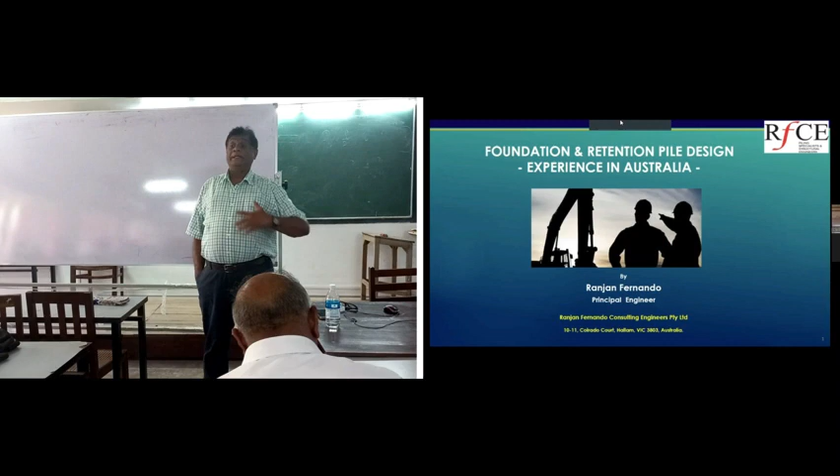That's been my job since 2010. Even now I'm doing the same thing, but with different companies, because my old company is no longer trading in Australia - I lost my professional indemnity insurance back in 2008. So let's get on to the presentation.

This is the presentation I'm going to do, but I won't spend too much time explaining it. There are 11 case studies, all projects already constructed, nothing went wrong - all my value engineering designs where Australian engineers designed one and I changed it and signed off. Except for one, I signed off on the rest of the designs. They were done before 2018.

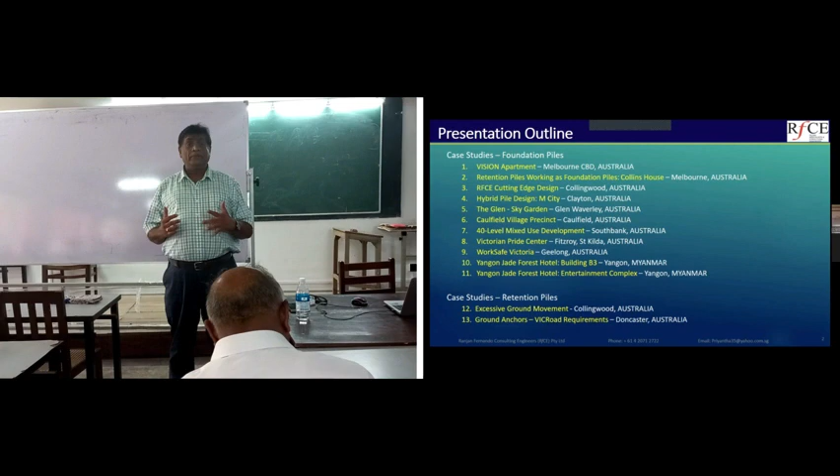Then there are two nice case studies you can learn many things from, but mainly my expertise is only piling. So even in geotechnical engineering, I do pile design, retention, ground anchors, foundation piles - anything related to load bearing or laterally loaded piles.

This is case study one. If you go to Melbourne or Google it, you can find this - I think it's number 72, a story called Vision Tower, where I completely optimized the foundation design. It's a huge loading, so I'll show you what I've done basically.

Not very sure whether you can read things, but later you'll have time. Can you see that there are very few piles, and one-third of the footprint is taken by the core area because of huge wind loads and earthquake loads? Those loads are provided by the structural engineer - I've got nothing to do with that. I take their loads.

My expertise is the geotechnical part, what we call value engineering with rock mechanics, using the parameters. When you do your geomechanics, you must know how to do the borehole and how to follow the soil report parameters. But in all my designs, I don't follow the geotechnical engineer's parameters.

That's my specialty. Even Golder Associates, Douglas Partners, Coffey - all three top-class engineering firms in Australia - they give parameters. But starting back in 2010, I did a bit of research, went to the job site, understood the quality of the rock, and started my own approach. Before I did that, there was no engineer capable or willing to take that risk to come up with this design.

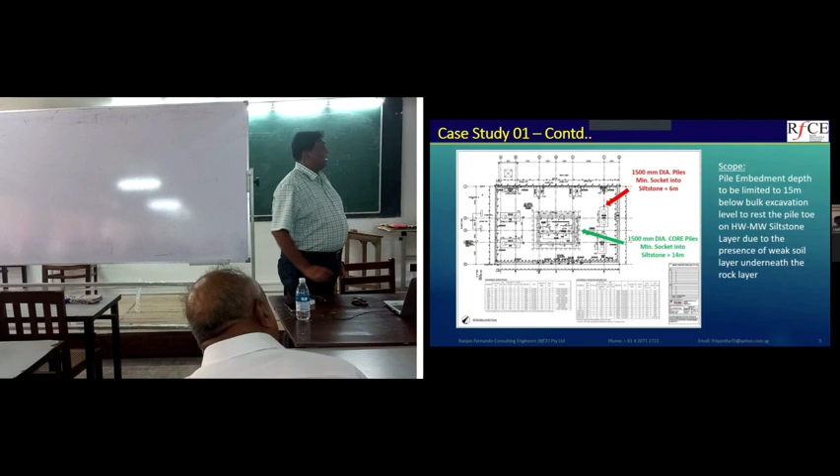Can you see the excavation? I designed a temporary retention system with ground anchors, and you can see the piles started about 6 meters below. That's the core area, and you can see the foundation piles. The ground is very good, can you see? No formwork - they cut it vertically because it's stiff clay.

This is something called PDA testing. I'm not very sure whether you are learning these things in final year, but when you go to practice, you will learn. It doesn't matter if you haven't learned PDA yet. It is pile driving analyzer - you design the pile, then test it to check whether it can carry the bearing capacity and the skin friction.

When engineers challenge my design and say I can't use this parameter, I say I will do PDA testing, and I will prove that the parameter provided in your soil report is not accurate. So we have to spend a bit of money.

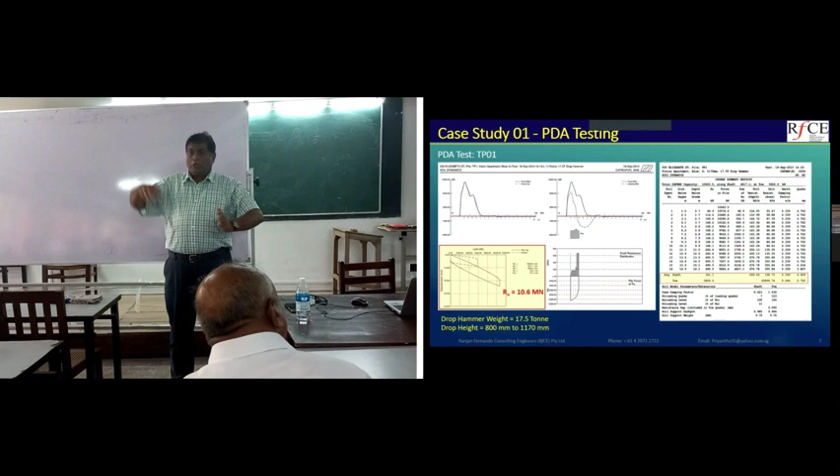What we normally do is build up the pile about 1 meter above the ground with good concrete, 65 MPa. You drop the hammer, put some energy, try to push the pile. Then you measure with strain gauges - I can talk about PDA one day, but briefly, you measure the settlements with the capacity.

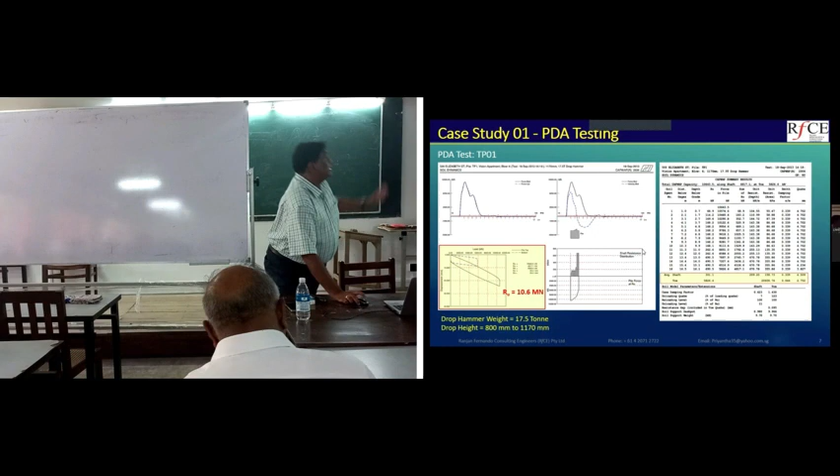The PDA analyzer will tell you what is the skin friction and what is the area for each layer. If you look at the right side - I'm not sure whether it's clear - you can see each layer, what is the KPA value for ultimate skin friction and ultimate end bearing. This is done by an independent engineer, not myself. He gives the report, then we submit it together to the checking engineer, and he has nothing to say. That's another test we have done, about 1 to 2 tests for each job.

If you look here, let me brief a little bit. There are certain indicators for how you interpret this - RMX capacity, all that you can go through later. This will tell you whether the pile is damaged.

When you get that BTA value, what's called the pile integrity factor, if it's 100%, your pile is perfect, you don't have any problem. Otherwise you might get necking, bulging, or vertical cracks. The other value will give you capacity - you can see in one corner they picked up a capacity of about 10 meganewtons. So then we compare with what we designed and show there is a safety margin.

This pile is 600 diameter. In Sri Lanka, I'm not sure any engineer would design 600 diameter for 10 meganewtons - am I right, Professor? They might go with 3 meganewtons. So that's the capacity I have proved on the rock.

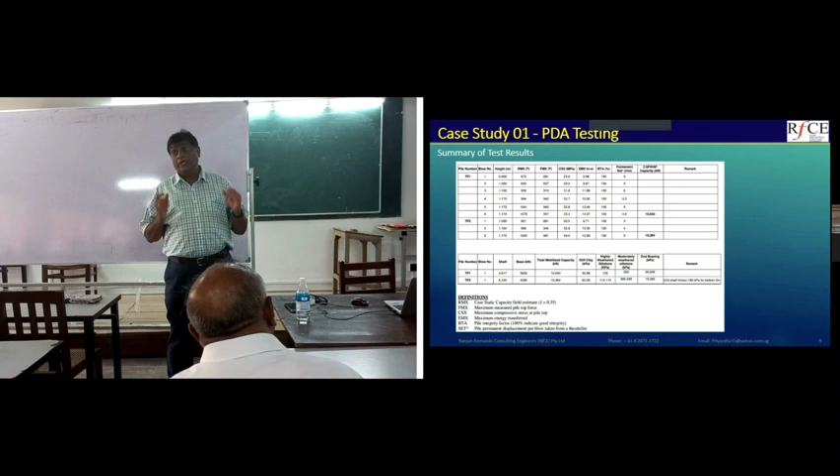You need to do this very carefully with the rock, then check it is within the right material, because when they challenge you and the pile fails, you have no face. Then the whole design gets rejected and you lose face with your client, because you have to add extra piles since your capacities are less. So we always make sure we do the right thing.

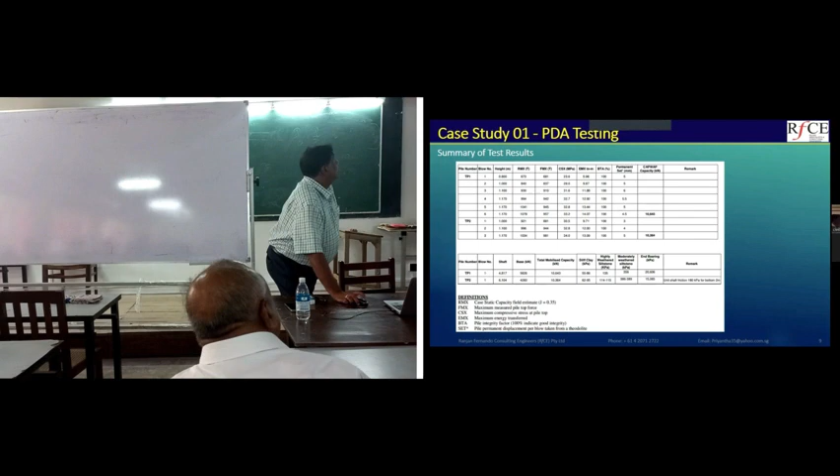This is the summary. I'm not sure how familiar they are with the parameters, so I don't want to go into much detail - I think they can go through the summary themselves, what the settlements are. I hope they understand it is very rare for a pile to fail in capacity. Normally, a pile will fail in settlement analysis.

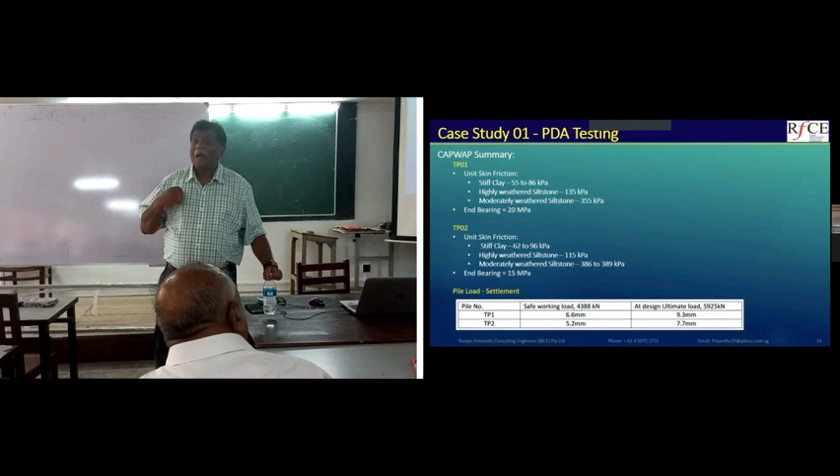Excuse me, I have a bit of a condition in my body, so I get dried up when I talk.

I have shown the safe working load, even 4,388 for 600 diameter, and ultimate capacity you can see I limited to 5.9 meganewtons, with settlement of nothing, 6.6 millimeters. Any structural engineer wouldn't have any issue designing piles for 10 millimeter settlement. So we provide all that report so everybody is happy.

This is what I did for this job, and now we move into case study 2.

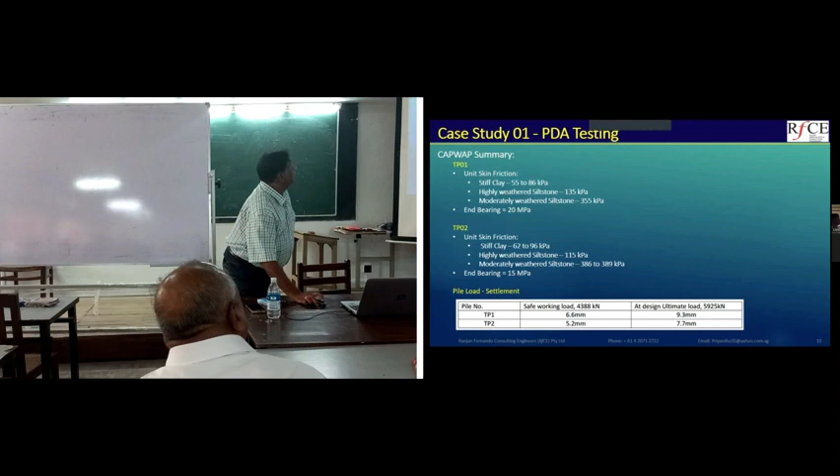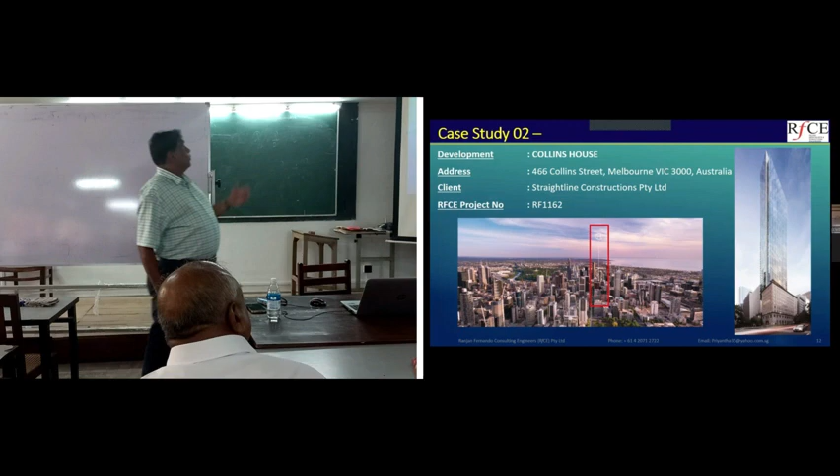You can see the numbers if you go to Melbourne - this is a very refined job, like a net ball court, very limited area. I'll go into the next slide. You can see it's like what they call a net ball court, going up to 50 stories, and the very challenging thing is there.

Your rock layer will dissipate after a certain depth and go into sand. So all these expert engineers designed 30 meter, 40 meter piles because they wanted to put a 50-story building onto a rock layer. It was very challenging, but I took the challenge - this is my design. I designed closer piles because of the capacity - look, 1200 diameter, 22 meganewtons. And if you look at 900 diameter, 11.5 meganewtons, that's the safe working load.

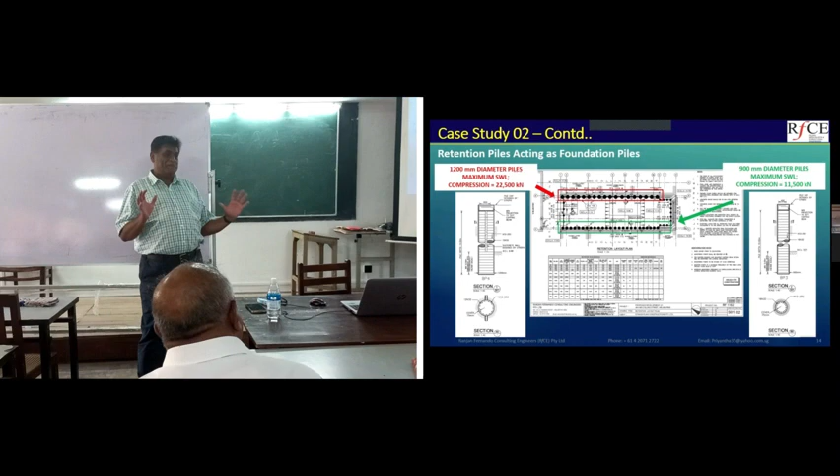This is ultimate or safe working load, sir? Working, safe working load. Right, so it's passive. But when I do the analysis, when you have a pile closer, you can analyze this as a rigid wall. This is an assumption, but it works, right? So we did all the analysis, saved a lot of money.

My piles are very shallow. Can you see? This is Plaxis 3D analysis - I'm not going to talk about Plaxis, that's the only software we can calculate the settlement. You can see I have gone 4 meter fill, MW basalt, below 12 meter clay. So my piles only stop about 2 meters above the clay layer.

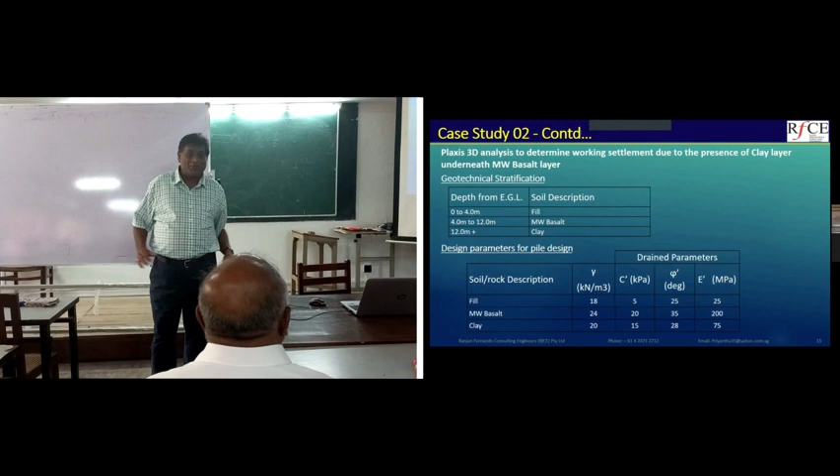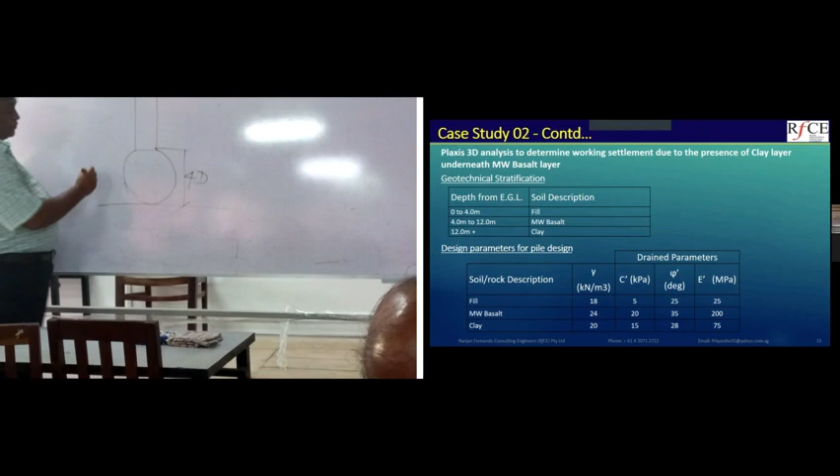I challenge all the textbooks because textbooks say you must have minimum 4D, right? This is very important. I'm not going to YouTube to follow theories, but I need certain things. Textbooks say if you want to stop a pile, following whatever theories and all that, you must have here minimum 4D. So I reduce it to 1.5D. So those are the ways.

If the building settles, I don't know what could happen. You can see, 50-story building, but it was all my confidence with my expertise, as well as when I go to the site. Some OCs call me rock doctor. I don't have any PhD, all experience, but sometimes I was joking, I smell the rock and I can tell the smell.

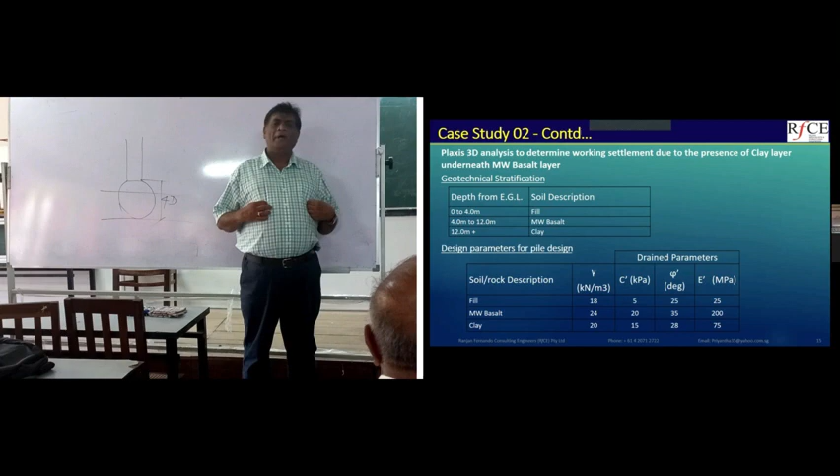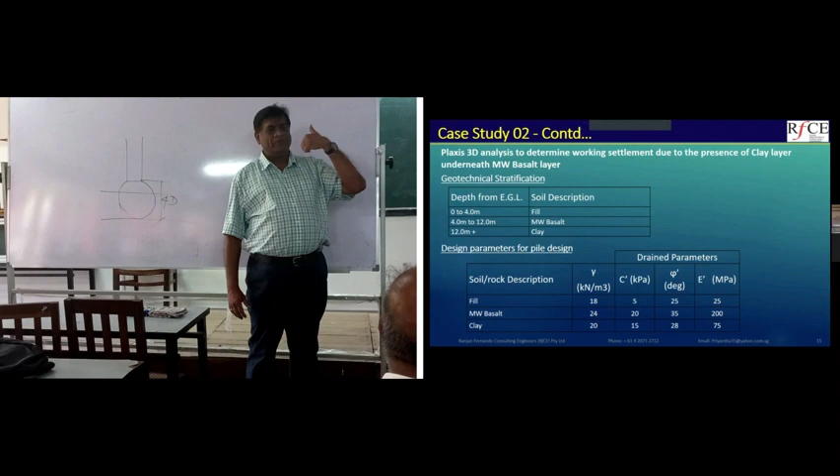That's the way I did the work, but it's all many years of experience. He knows that when I was doing piling, I am in the mud, doing all that stuff for many years. So when they have a practical problem, I don't have to go to the website, I listen, I can tell what they have done and what they messed up, right? So it was a very challenging design, but it worked very well.

So these are all Plaxis analysis, right? I'm sure they have done it. These days, actually, they have Midas GTS. I don't know about that software. This took me a few months to learn. Now I have one engineer, I just give him a parameter, and he knows how to do the analysis.

As the Professor said, you need to have a bit of experience. When you give the parameter, you should know what answer you should be getting. So I don't take what the computer gives - I will get them to analyze and get what I wanted. Because I think a graduate engineer cannot do that. It takes years of experience.

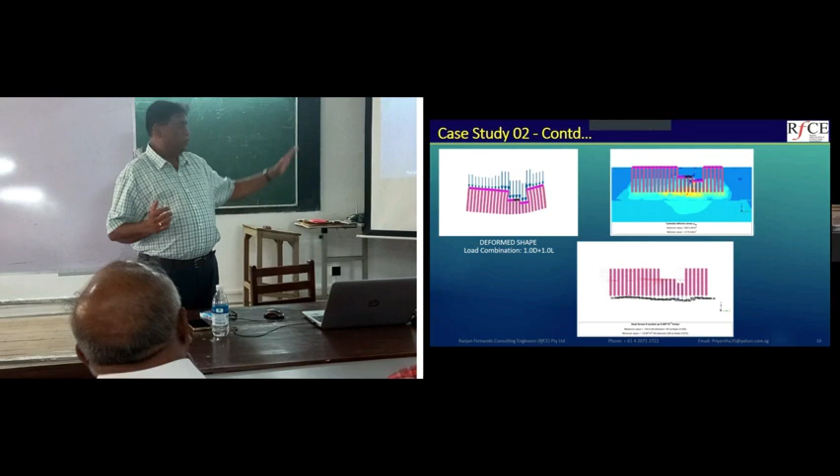Even my engineers, those who have worked with me 5-6 years, sometimes they are not in a position to do that. Then I sometimes say, I've got RFC, my company, magic wand. When they say they cannot get it to work, I say okay, I just hold these things, I go do it with them. So I'm not going to go into those details.

So all PLAXIS analysis - anyone interested, I'm happy to give some thoughts. But as Professor said, if you are doing other finite element software, all software do the same thing - you input parameter, you get output. You need to make sure you apply the relevant, appropriate parameter, and you should know when you put the parameter, I would be getting 2400 kilonewton meter.

So if you get 10 less or minus 5, fine, but if you get 250, that means something is wrong. You have to check all your program, because any software can give any answer. If you go through Google, one case failure in Nicoll Highway in Singapore, that's what happened - the engineer played with the parameter and got the site deformation, he didn't know until Nicoll Highway failed.

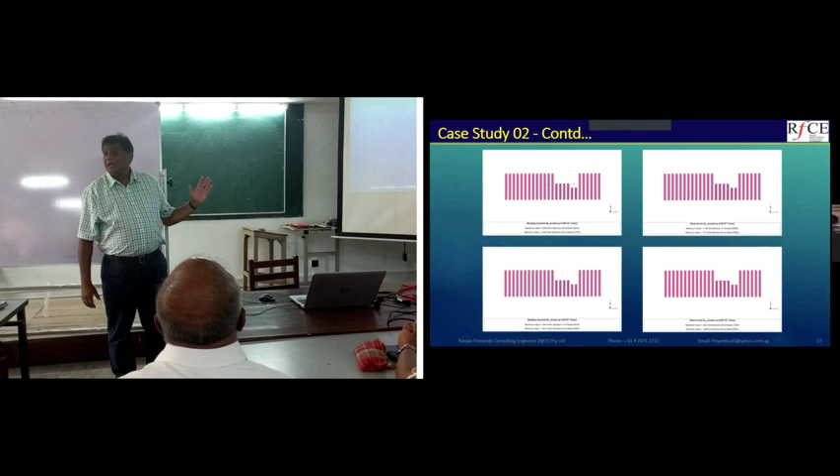Many cases, always try to learn. How many people were sent to jail? 4, I think 4 people. Always try to learn from other people's failures. I learned many things from other people's, little guys' failures, but unfortunately, I learned a big lesson from my own.

Whatever I told to the government now is a mistake. I'll talk about that one after the end of the inspection presentation. I think that's of interest. Okay, so let me - okay.

Case study 3 is the same thing, called another cutting edge, right? This is a very interesting job, I'll show you a bit. So this is the Australian engineer's design - he came up with a double pile. Each location, can you see, he's got a double pile with a pile cap. I hope they understand that - you have 2 piles, you need to connect a pile cap, then you put the column. Transferring the load shared by both the 2 piles, but expensive, right?

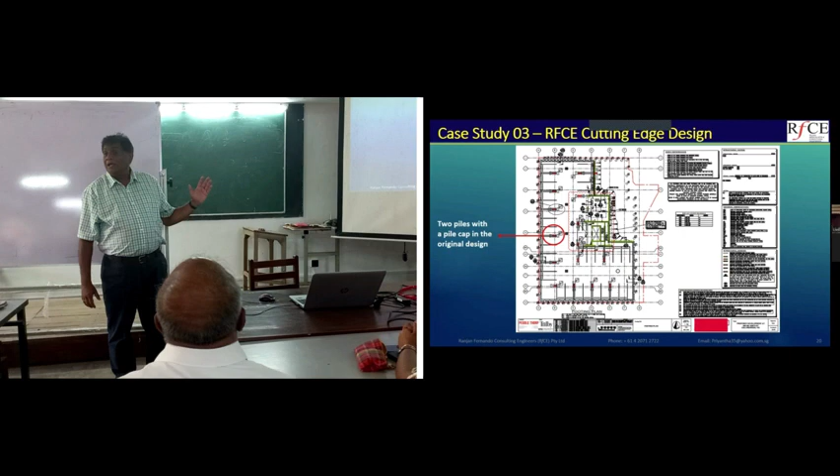Pile cap and the 2 pile. So I came up with the design that no one has done. My design got only a single pile, right? And then...

I deleted the pile cap, right? So I am going in an outside way than the normal engineer's design, because in university you learn you need to have a pile cap. Even the professor would say that's standard practice because you are taking a huge risk. If you have 2 piles, if 1 pile fails, there is some support. But if you design 1 pile with no pile cap, you put the whole load. If your pile cannot take the load, what happens? The building will settle, right?

Massive insurance claim, right? But I came up with this, and I spoke to 4-5 structural engineers at that time - no one had done that. They asked me, Ranjan, not to do that. They asked me not to do it, but I said they are compression load. As long as it's compression load, you can delete the pile cap, you can directly transfer the shear. I hope you understand what I am trying to say, right?

So even the starter bars, my client doesn't know how it works. Later I drill and put epoxy. I hope you understand, you drill into the concrete and then you use a standard epoxy grout and then bury it deep there. So it can transfer the vertical loads to the pile.

So it was a very risky design. I have done many risky designs, but they would work, right? Then you will understand where I got into trouble later, right?

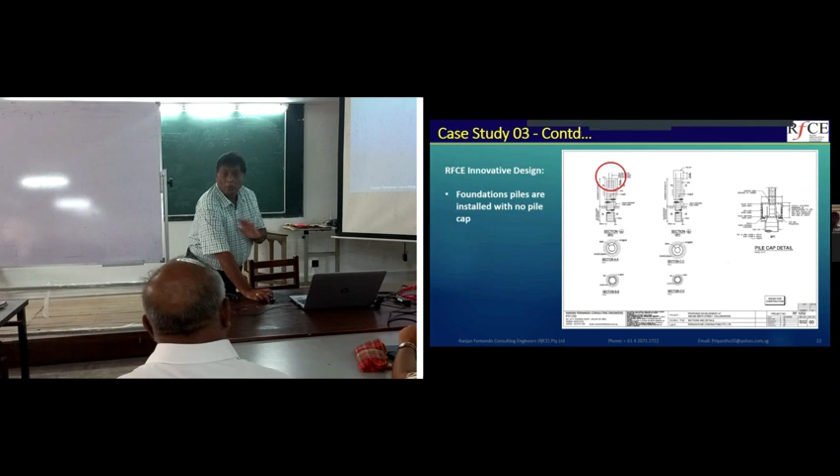Okay, we move to another one. This is another challenging job. They got piles and pads, right? That means if they design only piles, they need to be very deep. So the designer came up with a pad to share the end bearing of the pad together with the skin friction and end bearing, right? If you design just piles, it would be very expensive.

So what I did was - this was done by a very reputed firm called Golder Associates. It's everywhere. So I changed their design, and they normally don't like that in the market. I'll explain that later, because when you try to challenge other people's design, they were waiting until I make a mistake, right?

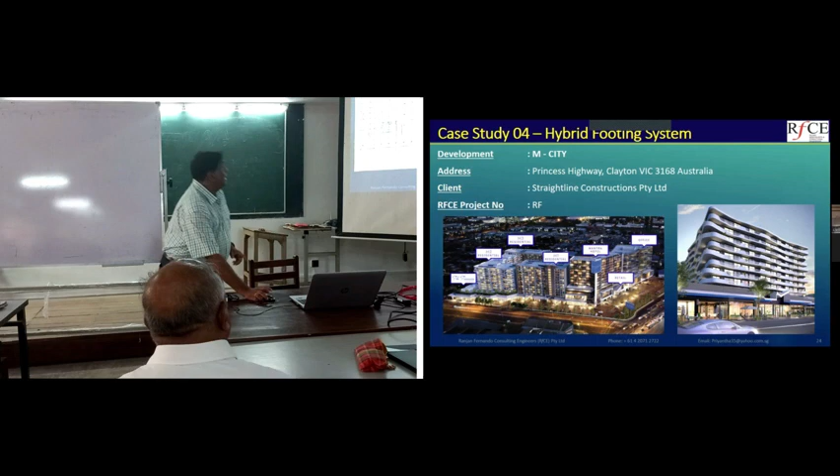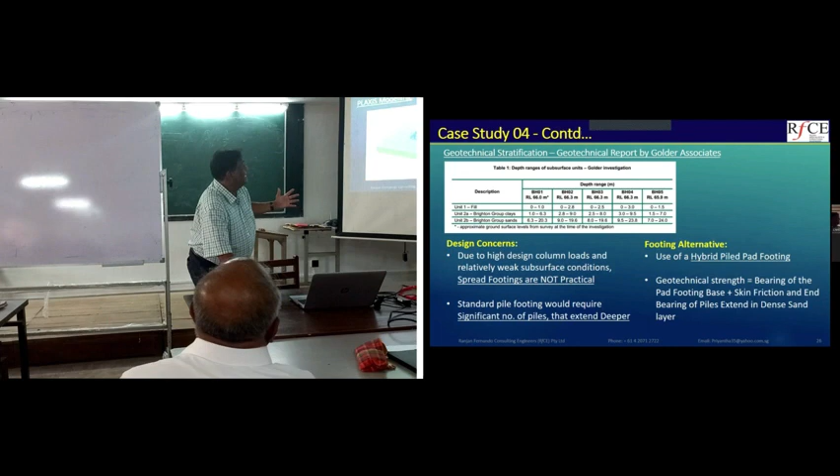When this is their parameters, right? Okay, so this is Golder - you can see Golder investigation. I'm not sure whether they are available in Sri Lanka, but they are available in the UK, all these European countries and all that. So these are their parameters, but I always manipulate their parameters. Then these are my parameters. I am sure you will learn all that - what is C dash, phi dash, all that. Anyone interested, talk to me, I can explain.

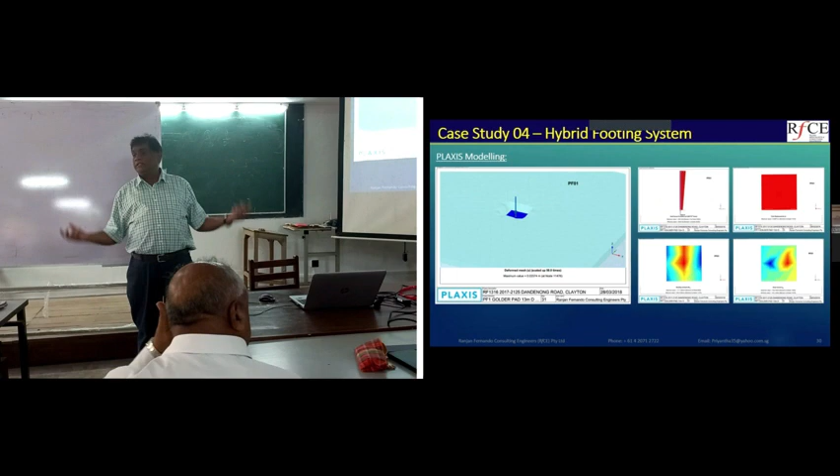So we did PLAXIS modeling, right, and came up with whatever the settlement. As I said, the important criteria is the settlement and the differential settlement. If you have a light load, heavy load, you see what is the differential settlement between these two. And if you get textbook value, you don't have any problem when the building is constructed. This has been completed - up to now I don't have any problem, but we have to change a bit.

Actually, I got two PhD guys - I never make all these presentations, they did for me. I just tell them what to do, how to do that. You can see it's like a small thesis, very standard.

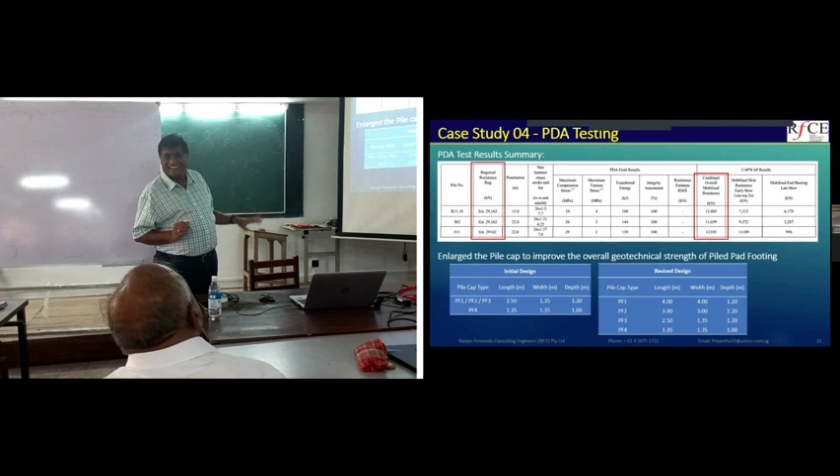There you can see, I designed the pile capacity but couldn't achieve the capacity, right? For some reason I couldn't achieve the capacity. Then you can see I modified the design, right? I increased the pad width in order to reduce the settlement. So we didn't have any problem, even though we couldn't achieve the capacity because it is a big heavy load.

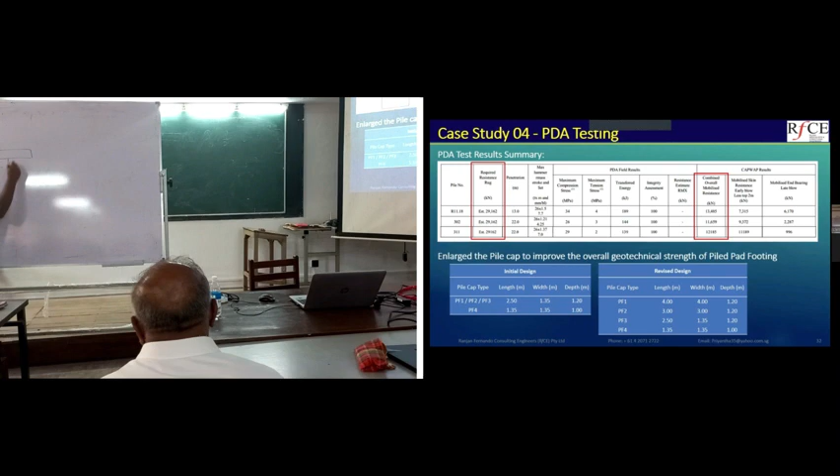You can see, about 29 meganewton, so we increased the width size. I hope you understand the point - I just give a small brief. I designed with a small pad with the pile, but I got a bit more settlement. Then I increased this width. What happened? Then you get a bit of embedding, right, to compensate for my settlement.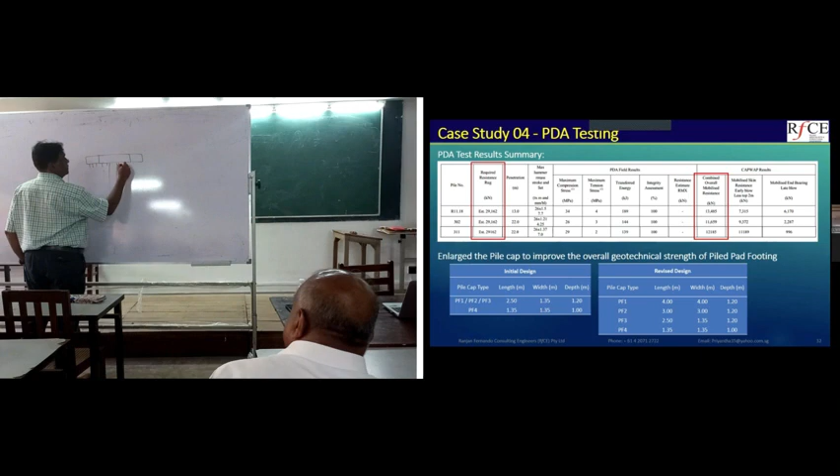Okay, then we managed to finish the project.

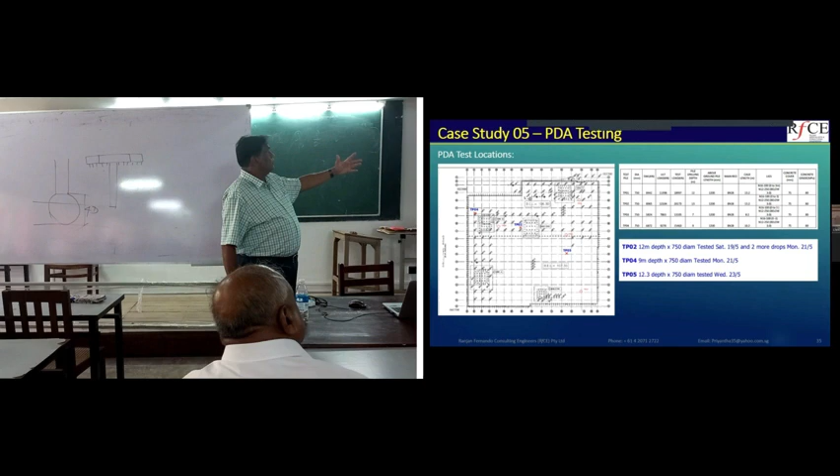Okay, case study 5, this is another one, similar. If you go through, you can see what diameter I use, what loading I use. All I changed it to optimize.

There also we got a little bit of issue when we tested the pile. If you go through the literature, normally you should test the pile after 28 days, that's the normal standard. But here I tested the pile at 11 days, because we got pressure to finish the job. Then it's my job, my sign off, no one can interfere when I said okay.

So we just did the testing and we had a bit less capacity. Then we argued with other engineers - if you want, we will test in 28 days. We picked up some technical papers showing that aging will increase the skin friction parameters. So they got it, okay.

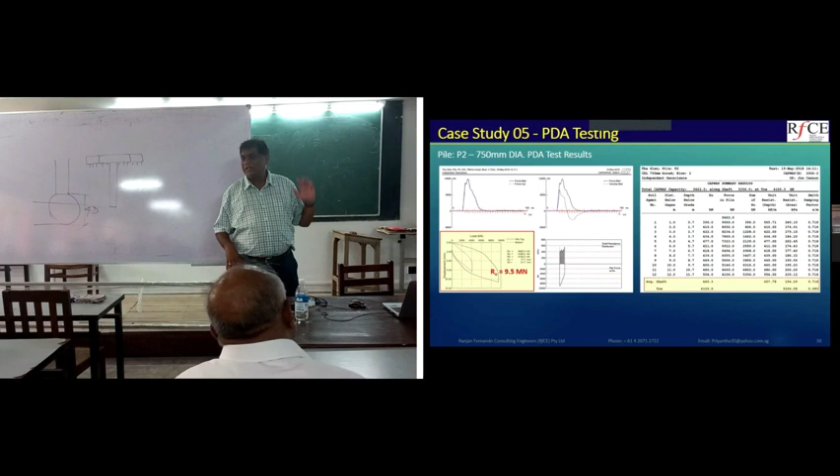experience, but they don't come to the job site. When they are drilling, I go to the job site and observe the material, how hard, what is their water pressure and all that kind of thing. I get a bit of feeling, having been working about 25 years, I know what from. So these are the areas that we have done.

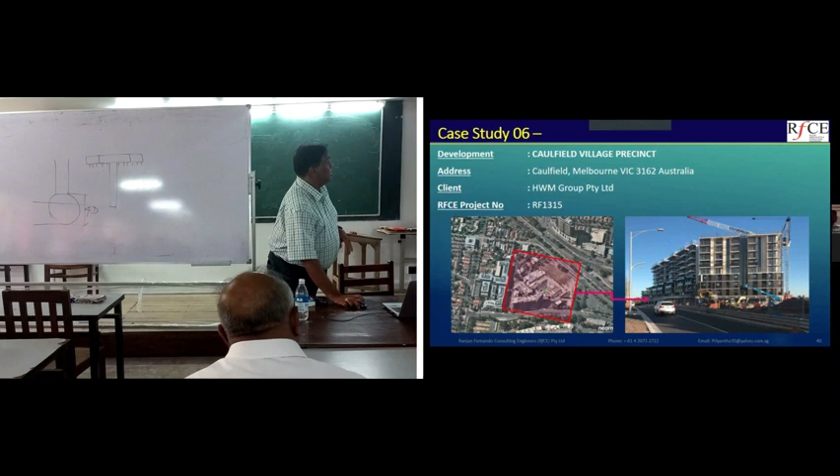Okay, so the other one is Caulfield race course. Same, completed the job. You can see we went 6.5 meters. In Sri Lanka, I don't think anyone dares to do that. In sand, we designed for

This one we tested with PDA. You can see the Golder report, nice letters, what they have given. So I used parameter 200 and 10,000, 12,000. If you look at any soil report here in Sri Lanka, even the metamorphic rocks, biotite gneiss, they would use something like 200 to 250, maybe 5,000, 7,000. But you can see I pushed sand to 12,000.

Engineers didn't want to push parameters and get into trouble with settlement. Because if you don't test PDA, how dare you tell people your piles can take the load? Important thing is not taking the load, it's the settlement. Because if it undergoes more than 50 millimeters, your floor gets cracked, your pipe gets cracked. You'll have so many problems. Then the structural engineer points the finger - you have optimized, you have pushed the design, never followed your soil report, now we are all in trouble.

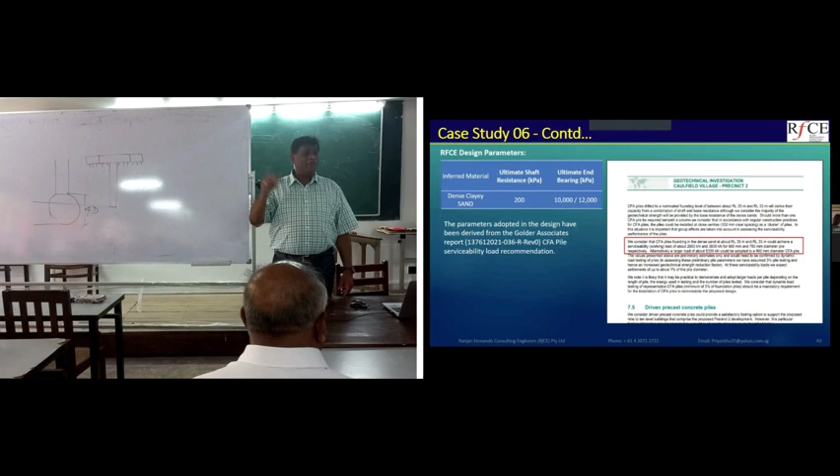Okay, this is Grow Constructions, also another massive building. You can see the tower, I think from my memory, 40-level story. So it's a similar thing.

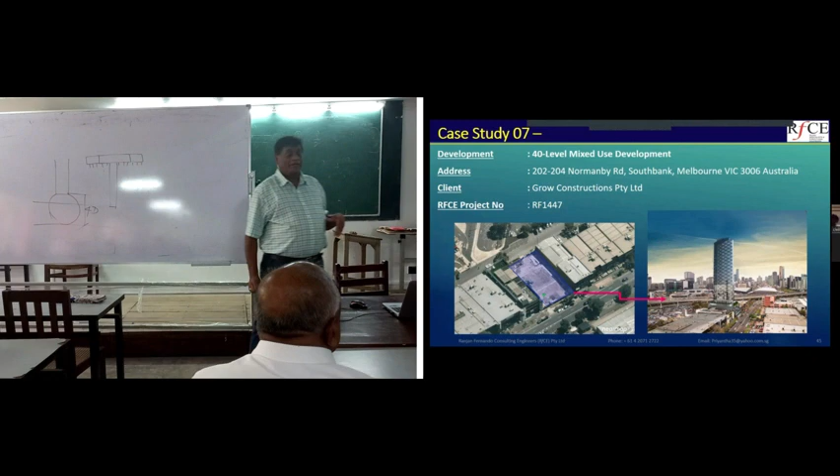They have given some parameter, some soil report, and there is a little bit I added. You can see all these piles are connected with huge beams, because they have something called Coode Island silt. It's something same as Sri Lanka's swamp.

What is the material here we call? In that swamp area there is a soft material - I forgot, peat. Yes, peat soil. When you design a pile in peat, you need to calculate what you call negative skin friction, and then you have to add it as a structural load. Same thing there, so I was worried about the differential settlement.

So I said I need some beams, so structurally it's active, you can't see clearly. But if I draw a picture just to get a bit of understanding, you have a huge one, then you have pile cap, pile cap, pile cap, and I run a beam across.

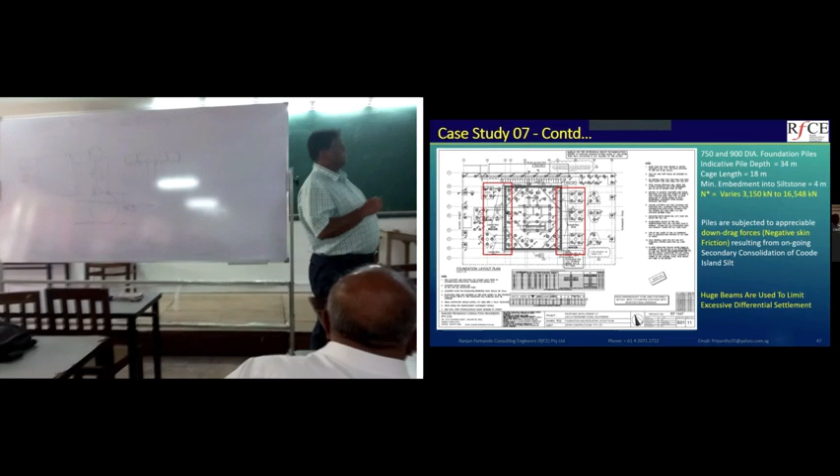My idea, what happened then - this is huge, they all tie together, so you control the differential settlement. Because they couldn't drill, rock level is very deep. We went about, still, I think from my memory, 34 meters.

Okay, so you can see Plaxis modeling, right? We model the beam, all that. You can see we calculate the differential settlement, about 5 millimeters. Those, I am not sure what the theory book says, I think they will learn for computational geotechnics.

What is the subject? By Dr. Ranjan. Okay, so this is actually part of computational geotechnics, but I am not an expert on that.

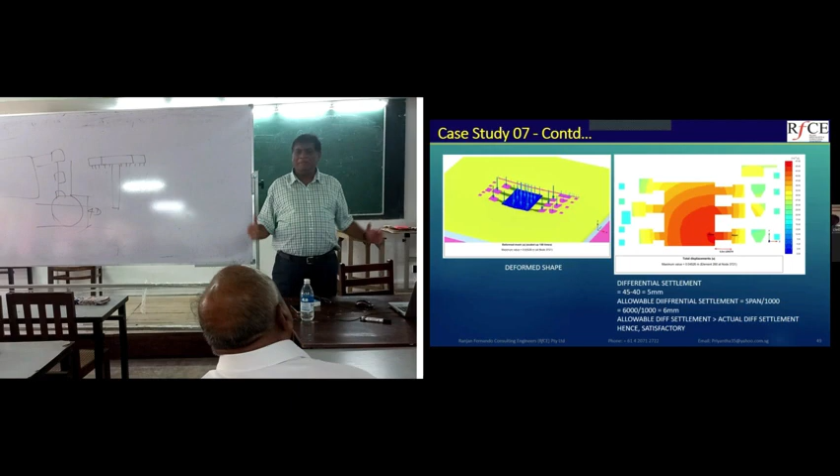Allowable differential settlement - professor must be knowing better than me, but I went through some books, and for a span over 1,000 I got about 6 millimeters. So I said fine, up to 10 millimeters, no structural engineer in Australia would say anything. 10 millimeters is nothing, right?

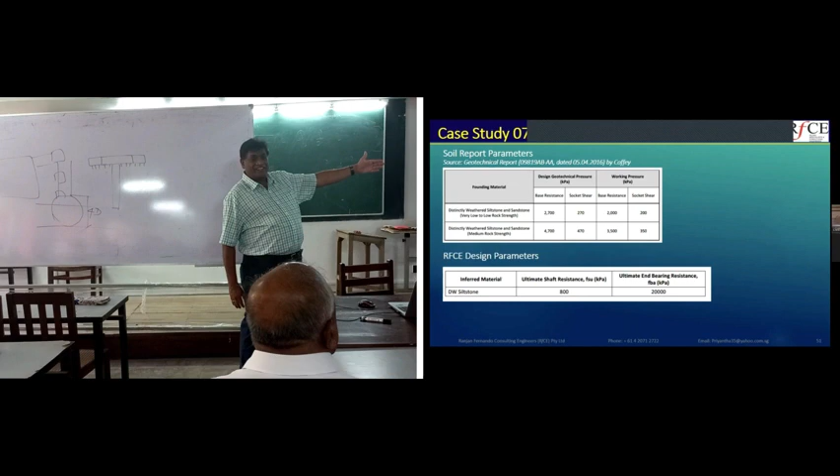So this project has been completed, we don't have an issue. All this Praxis computation I attach - you can see, based on the soil report, the expert engineer used maximum 470, I used 800. He used 4,700, I use 20,000.

I pushed a little bit further than my normal expertise with the material, and we did something called CFA piles. Do you all have an idea what's the difference between bored piles and CFA piles? No? Haven't done. Okay, I'll give you 2 minutes - it's important, right? Okay, bored piles means you have the ground, you drill through, remove the soil, go all the way down.

In Sri Lanka, you have biotite gneiss, you go roughly 2 meters. But when you drill through, you have to put in casings because you don't have stable soil in Sri Lanka. Wherever I work in Sri Lanka, we always use casing.

Then we use some material called bentonite, a soil stabilizing liquid, that gives you pressure, you fill up the hole all the way. Then you insert your steel cage, then you put in the tremie pipes. Anyone want to know any information? I can explain anything. So we pour concrete, flush everything, get a good pile.

But CFA means continuous flight auger - you have a rig with a continuous auger. Any unstable material, you drill all the way through. We can now do 40 meters in Australia. So the auger is inside, no collapse, even if you have water, because the auger is there.

Then what you do is pump concrete - the auger has a hollow section, you pump concrete all the way through the hollow section to the pile toe. As you progress, you withdraw the auger, so what you're doing is building up a concrete column. Read books, you will understand, because I have no time to explain further.

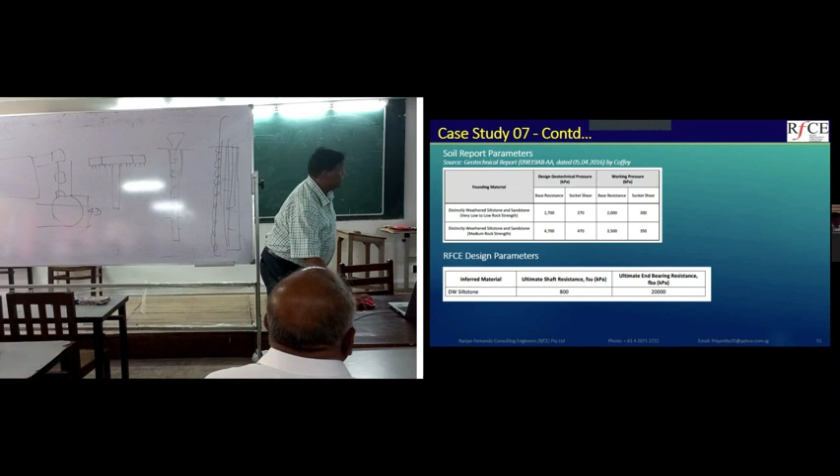Okay, next one. Okay, so bit of the same PDA testing, same thing you go through, similar thing, repetitive. I just show them how we justify the capacity. Okay, this one is a small project, doesn't matter, I passed that one.

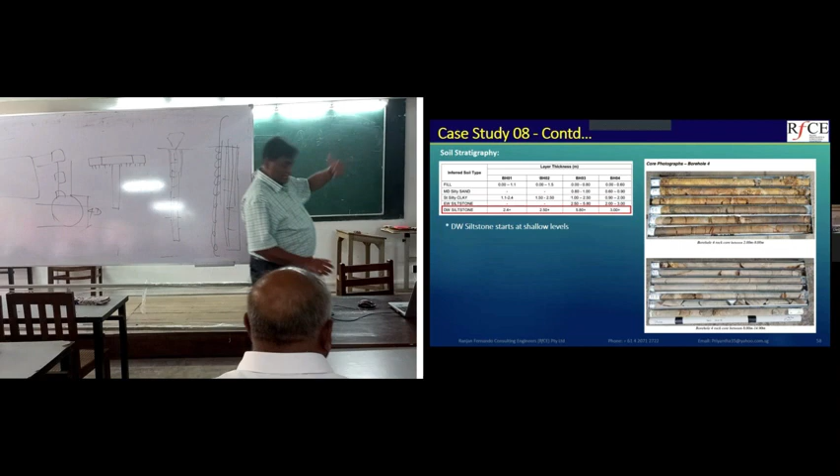I do not know whether you all understand indemnity insurance in Australia. Here, like in Sri Lanka, you're a chartered engineer, you can practice, right? But I don't think you still need any insurance - not mandatory, not mandatory.

In Australia it's mandatory - we call it registered building practitioner, I was one of them, and you need to have a PI. If you don't get a PI, you can't practice. So I continue my license with Sunny Engineering, one of my friends - I trained him and he got all the qualifications, he studied in Australia. So he signed on behalf of me. That's how I am surviving in the industry now.

Right? Okay, but he doesn't bother to check or anything.

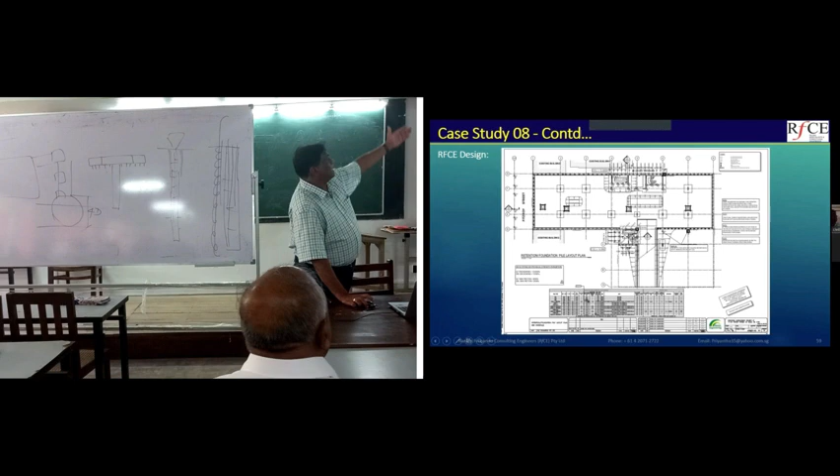So here, same thing, you can see comparing soil report parameter and what parameter I play the game of changing parameter. The soil report says 1 MPa, I use 15 MPa, so 15 times higher than this.

Then I test the pile. I have given a certain criteria. I test the pile. You see, even when they pour the pile, I was there always, because sometimes they don't understand how to pour the pile correctly. If they don't pour it correctly, you drop some sedimentation at the pile toe, and when you apply the load, you get 10 millimeter settlement with one blow.

Then you have a problem. So those days, mainly those Aussies, they listen to me. Mostly they understand my experience and they don't argue, because what I say is if they don't follow, I reject the pile, I don't accept it. So they worry about it, then they get screwed up from their bosses. You say, no, I'm not happy with the pile, I don't want my recognition, my reputation there.

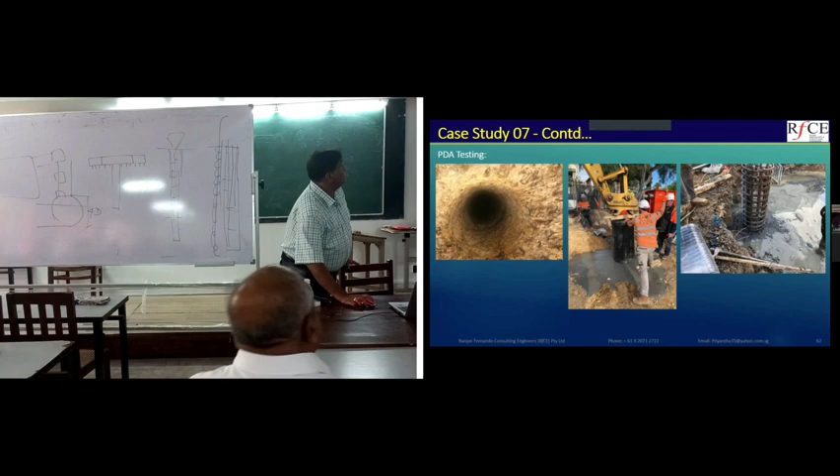So anyway, I'll go through the next one. First, PDA testing, same thing, you can go through with the skin friction parameter, how we achieve it, all that. Okay, I'm very close to finishing now.

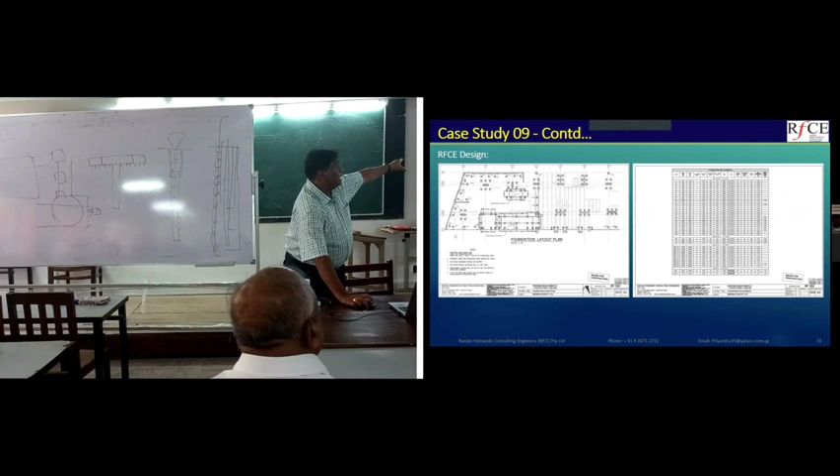You can see even it is clay. I don't think any engineer here has designed for clay. There might be a little bit different clay than what you have in Sri Lanka, but I have normally used 300 kPa, end bearing 1800. Friction I use 100 kPa. Normally textbook guys and less experienced people will use 30 to 60.

So this whole design, the key point is I adapted different parameters to save money. You understand, you use a pushy parameter, you reduce the skin friction area and bearing. You are taking that risk.

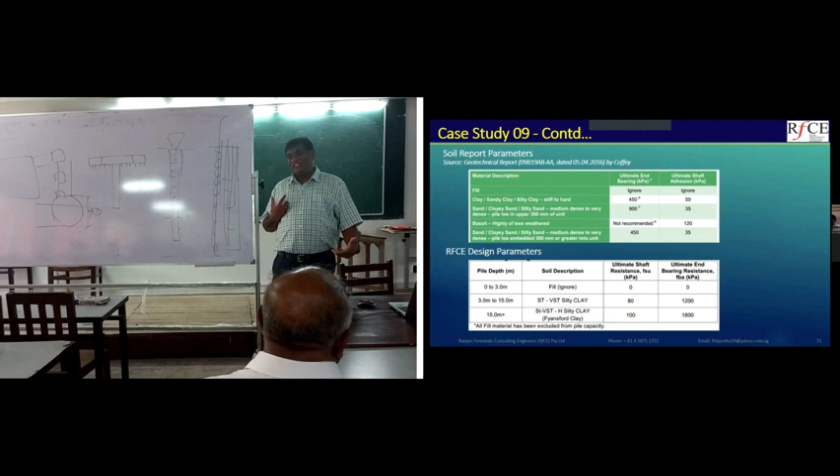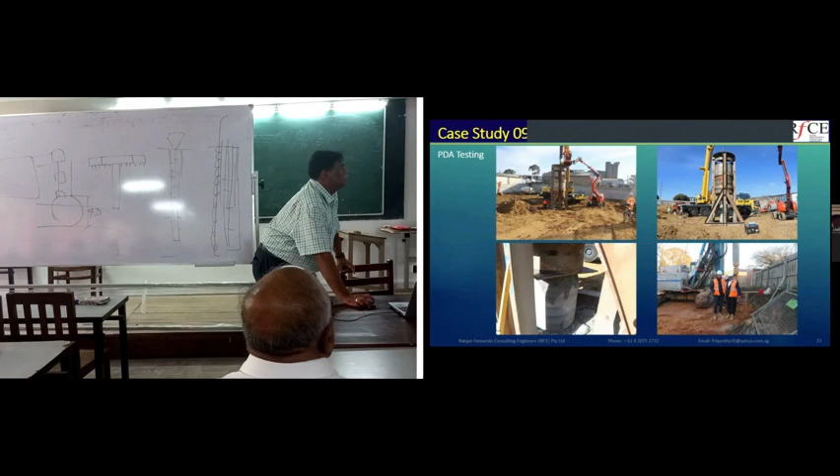Okay, so it is PDA testing. Every job, this is the game we are playing. We take a trial, we are confident with the job. I had a little bit of issue on 1 or 2 jobs, but most of the jobs we achieved whatever the PDA capacity was, what we required.

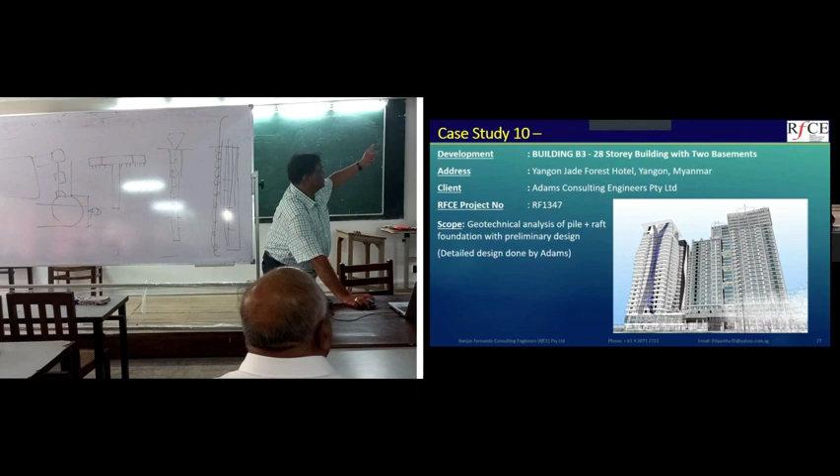Okay, I think this is the last one. I didn't know anything here because I did this job for a big consultancy company, a project in Myanmar. So I don't have any ground experience there. I told them, but they are happy. So designing a bit conservatively, you can see my design, how deep, 55 meters, because I have no experience.

So I didn't want to push the parameter, exactly as per the soil report, because I am not going to have to test or check anything. So can you see the number of piles there? Actually, sir, I kept the same number of piles that the structural engineer designed. He doesn't know how to do the settlement calculation. I said, mate, you give me a rate, I'll go there, I'll help you.

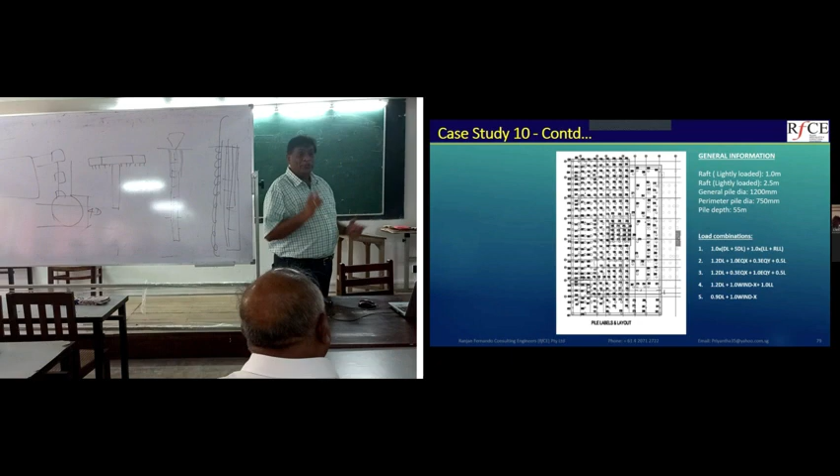So they just took the contract, the design contract, and me and my engineers, those doctors, are doing the job. So you can see, you need to play the game where you do not know, you have no expertise, to do a conservative design because you don't want to take a risk. It's about a 28-story building.

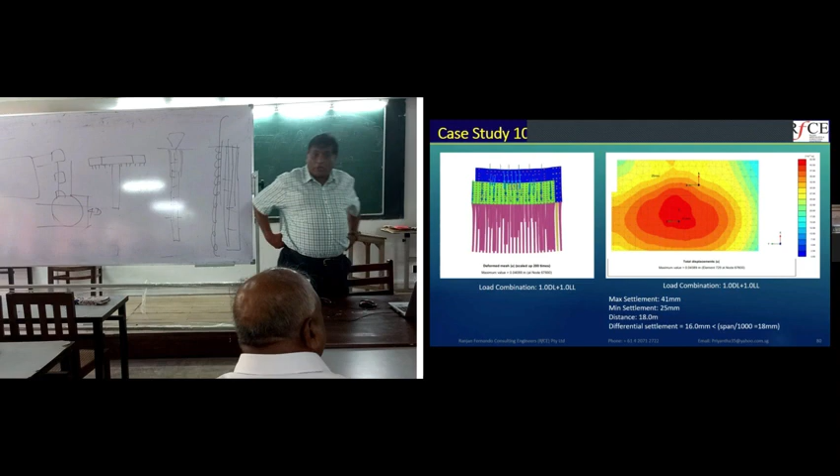So it's the same practice. You can see settlement analysis, and I calculated differential settlement. So is that okay, you consider span over 1,000 for calculating the differential? Should be all right, right? I referred to some technical literature.

And what happens is, if the beams are very long, the effect of settlement is very low, because settlement is not going to happen at once. So it happens, and the creep of concrete will reduce the impact of settlement by about 50%, because the building is constructed step by step, so things happen very slowly. When things happen very slowly, the creep of concrete can relieve most of the stresses. I hope you all understand the right creep calculation.

No, they don't understand anything because they have very poor knowledge of concrete. No, it's all right. When we studied, even he said, most of the time I was sitting behind in the auditorium, same as those days. I believe they got PhDs and all that, I am the only guy who got a BSc engineering degree in Melbourne. No, yeah, I mean even you invited me to do presentations in your seminars and all that.

Those days we only used to hear scholars come and do presentations, and I'd sit behind, maybe the professor didn't notice me. There were a couple of guys with good command of English who asked questions, but we didn't bother. I don't have any issue, even if you ask me in Sinhala, I can speak it very well, but I'll explain in a bit of English to keep the standard.

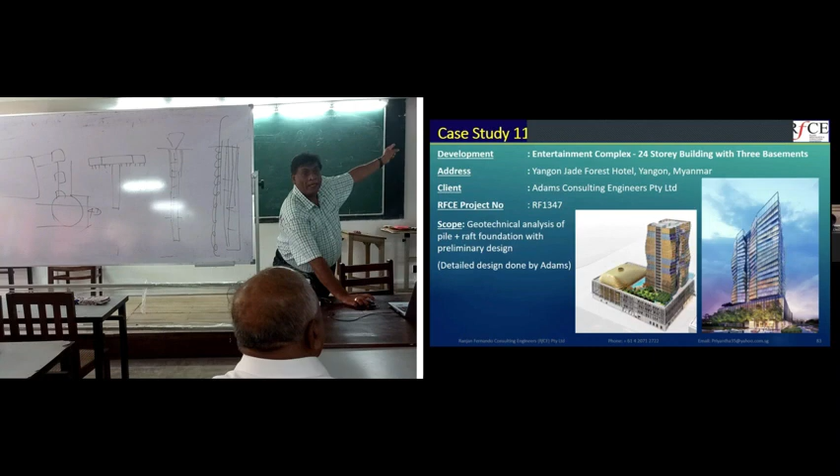You can see 47 meters, because I'm not an expert on the ground, so I didn't cut it down. It's also an earthquake zone, and they have given EQ loading as well. You can see we follow all the load combinations as per Australian standard, picking up the maximum load. Can you see the number of piles?

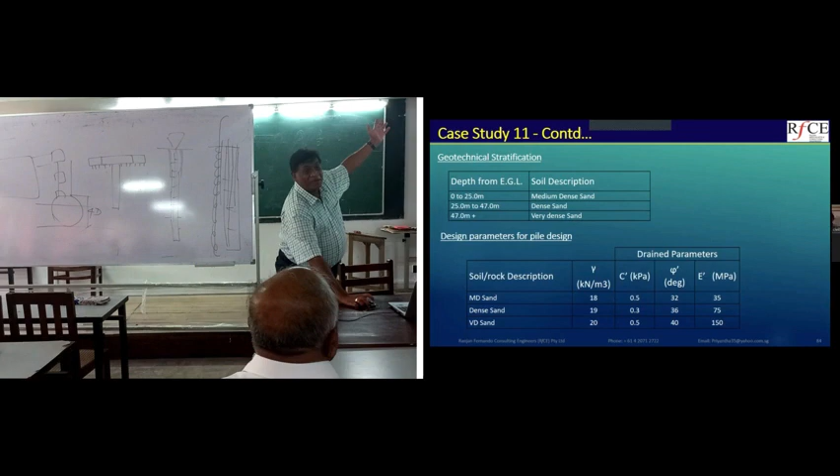I could have cut about 50% if I knew the ground, right? So it's a massive cost. Can you see the piles? No need for any rafts, right?

Okay, so you can see the pile size, 1200, 55 meter. You've got nothing to worry about, you can sleep peacefully. A 55 meter deep pile will never go anywhere, right?

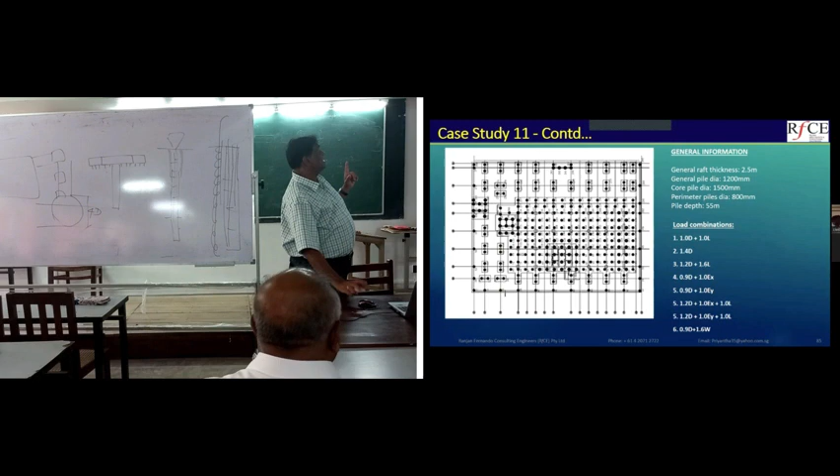Okay, same practice stuff, right? You can go through. So this is another case study I'll quickly cover so you can learn how fantastic concrete is. When you learn concrete, you think after certain deformation it will crack. This project taught me that concrete is super elastic, maybe the professor wouldn't agree with me. I'll tell you how we achieved this. We did the job based on this analysis.

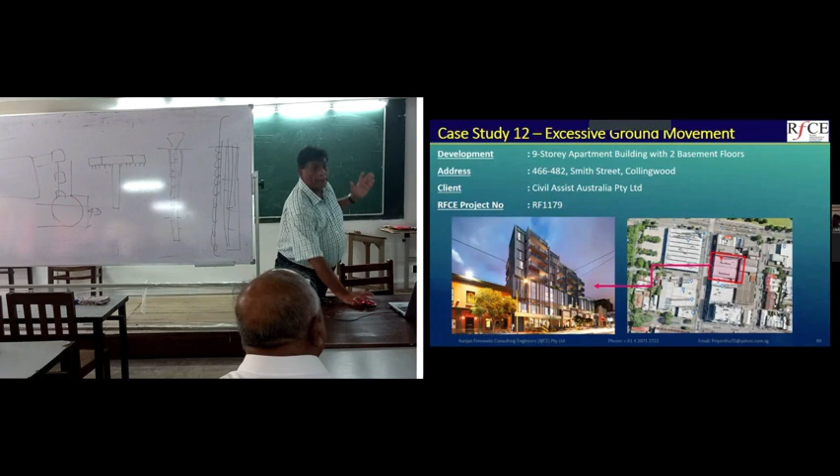Then what happened is the walls started moving, the retention piles started moving. But the client didn't tell me until it reached 150 millimeters and failed. I normally allow 20 millimeters. You understand what lateral movement is, right? I hope to just draw a small sketch since it's important.

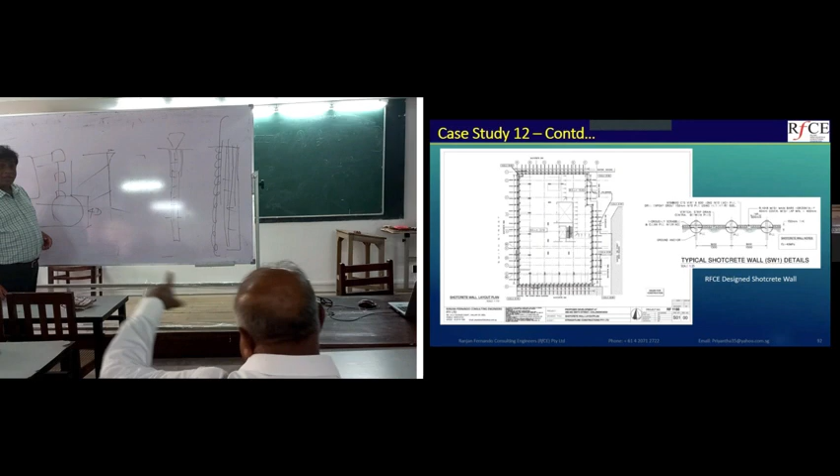So you have a retention system with an anchor. When you excavate, this will deflect like that, 20 millimeters. We do all these calculations to achieve 20 millimeters. They'll learn the calculation and techniques for how to do this in 2D practice. Okay, right, yeah, that's good.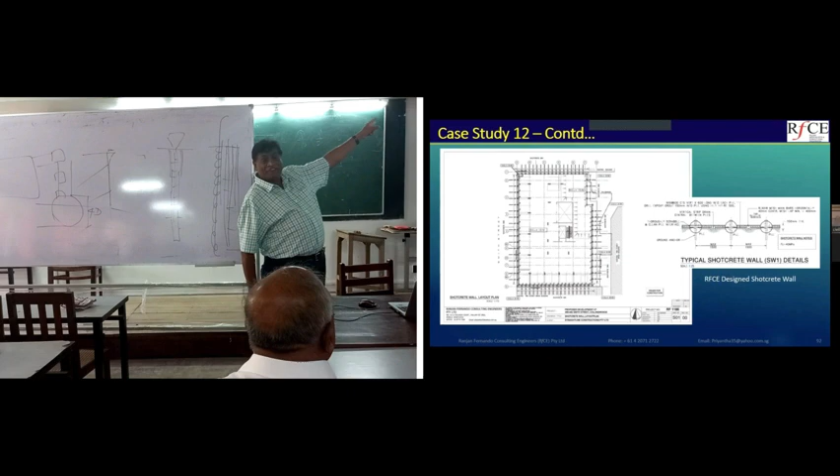I'll just give you a brief thought of what happened. So this went to 150 millimeters. You can see the pile should crack and would have a big problem. Even the anchor failed, while it hadn't cracked. When they called me at 150 millimeters, you see it didn't work. That means, you can see, I designed for 7 millimeters, side deflection 200.

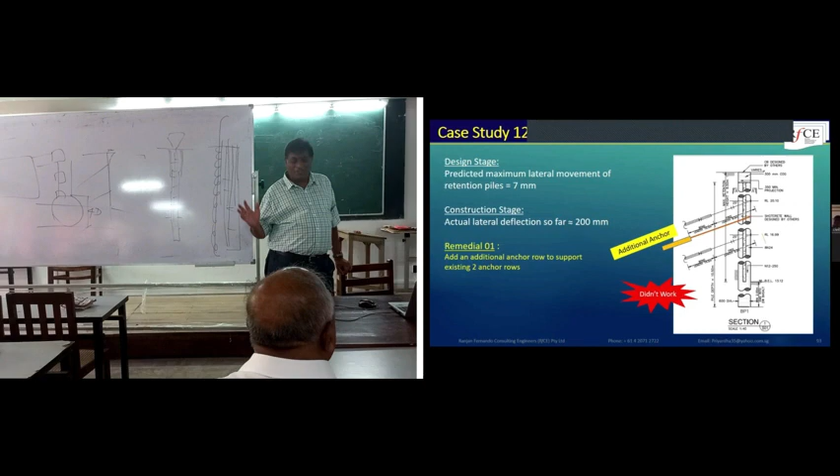Then I said, wait, you're going to get in trouble. Put the extra anchor. We put an anchor and it didn't work, right? Then you can see the proposal. I always have a solution, any problem, piling, I have a solution.

So these are the road cracks, right? These are the ones we went to see in 2018. You went with... yeah, yeah, this was cracked in Melbourne, city center, yes, right.

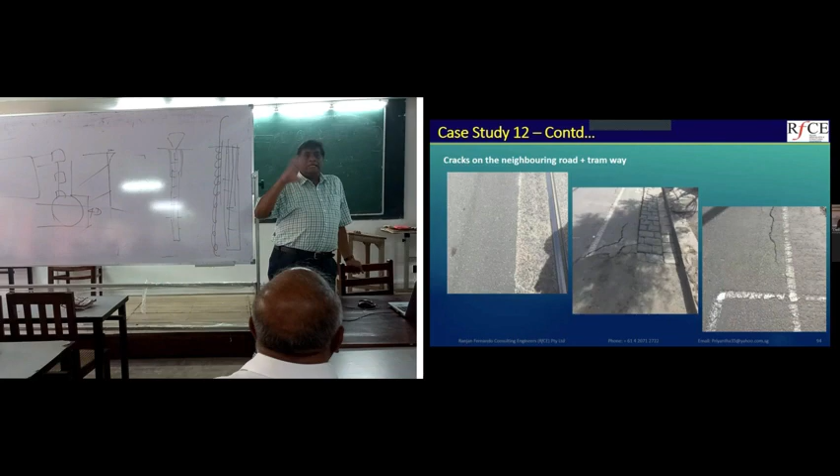Well, I don't know. It's because they put the wrong type of anchor. Yes, correct, because instead of grouting them without the free length, I can explain, it's another lesson, they grouted the free length as well. So when they stressed the anchor, it snapped, so it didn't work well.

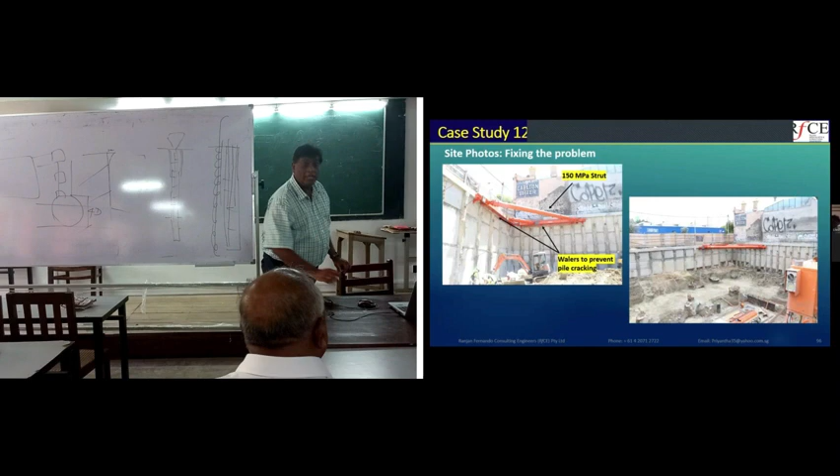So we came up with another solution, right? And you can see a nice photo where I put some supports, diagonal supports, designed and installed. They can carry about 1,500 kilonewton hydraulic strut. We don't manufacture it, we design it and get an expert to come and install, and we got the deflection under control. No one can push it back when it has moved before, but you can stop it from moving further.

But nothing, we haven't found any concrete crack. So we thought, oh my God, concrete can have that kind of elasticity, right? So we learned, no, it has cracked, but it has cracked inside, so many small cracks rather than one big crack. Yeah, maybe inside, so micro cracks. Nobody bothered about it, they go and say, Ranjan, no cracks. Then I say, yeah, you can see how good our design is.

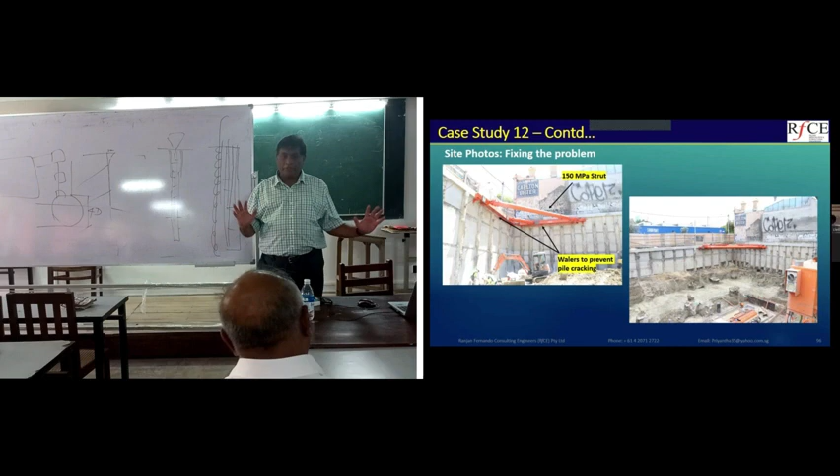Because if builders bring in an engineer, that's okay. But when you have issues in Australia, they don't bother - they say okay, you push everything, now you're learning the lesson. So the certifier engineer can do whatever to safeguard it. This is what I did, and it all went very well.

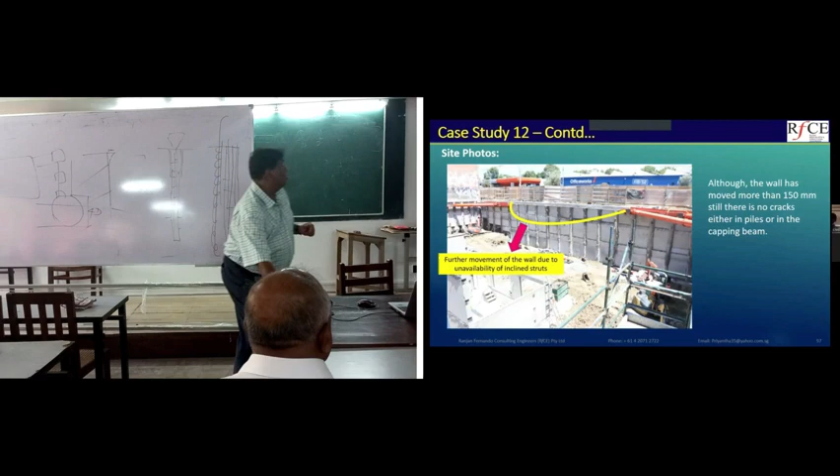But this area had a bit of deflection because we didn't provide incline props. If you provide incline props, it disturbs excavation and makes it difficult to do excavation, so sometimes we take a shortcut, taking the risk ourselves. Then you see the movement - it moved from 50 millimeters up to 200 millimeters over 160 days. But up to 150, no one had informed me that the wall had moved.

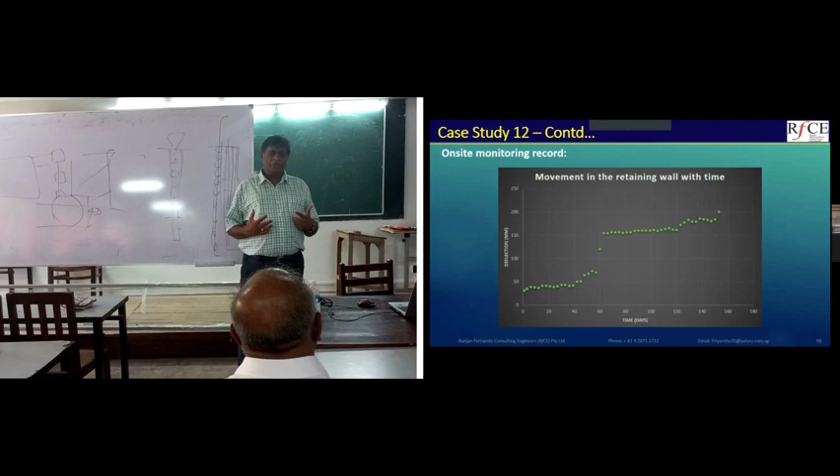So if something had happened, I could have covered it, but after going through all these court cases with the lawyers, it's a disaster. By the way, you will lose money - first of all, you have to pay $10,000 for the notification, and then go through with the lawyers, and it's a disaster. Luckily, I didn't have any issue with all that.

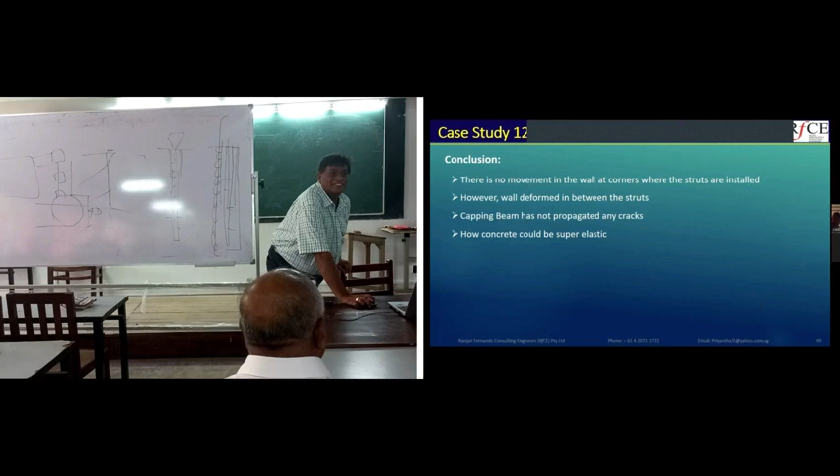So there is no movement in the wall at corners where the struts are installed. However, the wall is deforming between the struts. The capping beam has not propagated any cracks - how concrete would be super elastic, right? In books you learn engineers would design about 20 millimeters, but it can take more than that.

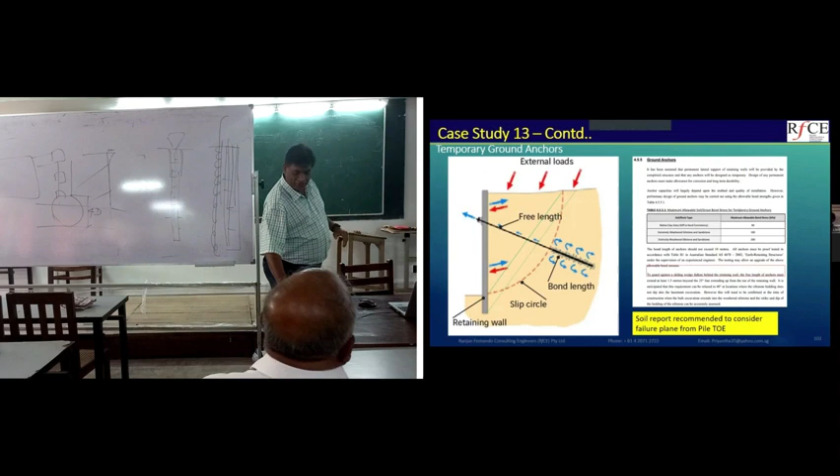Okay, last one. LTA construction group had a similar issue - they couldn't do anchors for some area. So this is the anchor design. You can go through later how we do the anchor design - free length, bond length, slip circle, all that. I'll try to manage the time, so let's just pass that.

There's a bit of how you calculate angles - those standard criteria you go through, only difference. I want to highlight that it's always the theory and fundamentals they have to concentrate on. Yes, because they are very good at getting answers without knowing the fundamentals. I had very good fundamentals, then I'll show you my failure where I missed some fundamental. Always, an engineer must have good fundamentals.

Whichever country you work in, there's a little bit different approach. We follow British code, you have factor of safety. In Australia, same thing, they call it strength reduction factor - you can see it's equivalent to factor of safety. Same design, when I migrated to Australia I never studied any code within 2-3 months because we were already familiar with the British code - just a similar thing. Only the loading is a bit different. We use here 1.4 GK plus 1.6 QK, there they go 1.2 GK, 1.5 QK. So you adapt to all those changes.

It's very easy, but as Professor said, when you want to be a design engineer, you should have a very strong fundamental background. I knew I would never want to be a design engineer because I got a second class lower. In Sri Lanka, those days only first class guys could get a design office job - am I right, our time? Yeah, and then second upwards. Yes, yes, so I didn't have anything, so we started elsewhere.

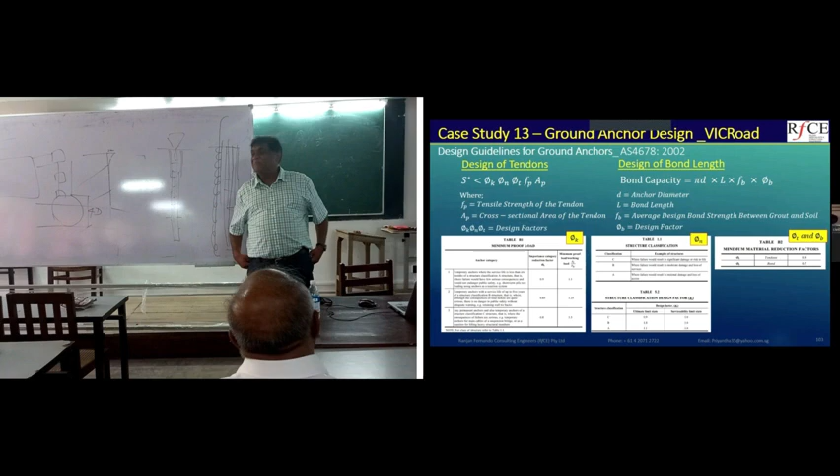I still remember I can communicate - those days I came from a school where we never spoke English. So we started picking up, and then I worked all the way overseas, and nowadays the language has become like my mother tongue, only I don't speak like an Aussie accent. When my children talk sometimes I don't understand, because they speak with an Aussie accent - you can see my English is very plain English.

Why did I design this diagonal strut? Because we couldn't do anchors - there was a ramp on the other side, a vehicular ramp, so you couldn't drill through that. During the design phase we didn't know that, but when they started construction they told me, Ranjan, owner, we can't do anchors, can you have another design? I said we go with strut, so instead of one strut, I put two struts - just to be safe.

Okay, right? I think 45 minutes, right?